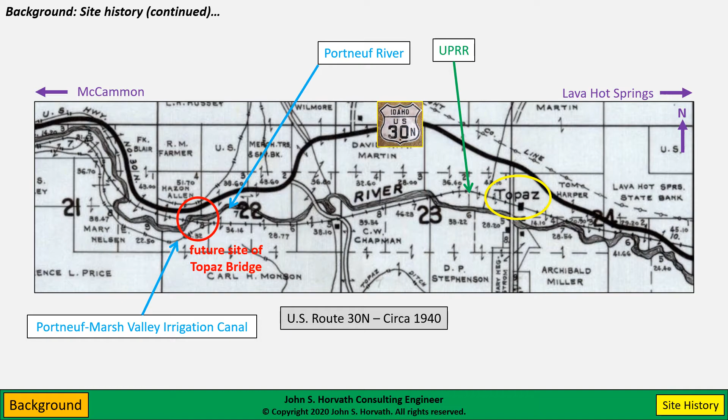Here are some historical photographs through the area. We see that the Portneuf River Valley is, for the most part, a fairly wide, flat valley, very classic meandering river type valley. There are mountains both to the south and the north, and you could see that the circa 1940 US Highway 30N was fairly typical of that area, certainly what was called an improved road in that it had a pavement wearing course.

In the late 1940s, right after the end of World War II, there was a decision to relocate a section of US Highway 30N, beginning on the west at this red asterisk and continuing to the right beyond the limits of this particular map. The site of the future Topaz Bridge was just to the east of the beginning of this relocation. This late 1940s relocation essentially moved the highway from the north edge of the valley to the south edge. So the original US Route 30N traversed the northern edge of the valley, the foothills of the mountains to the north, and the relocated US Highway 30 traversed the southern edge of this valley along the mountains to the south.

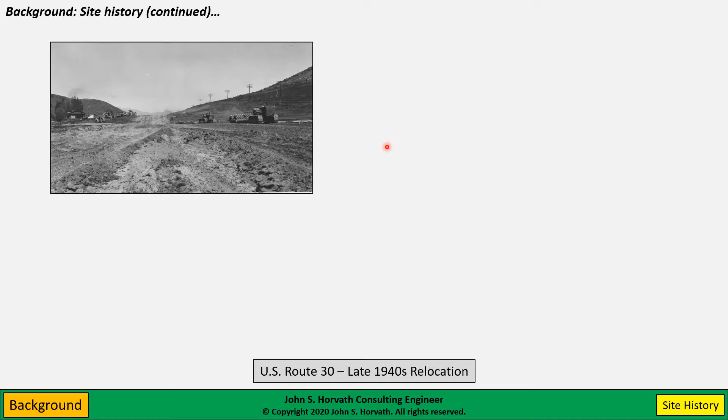These are some historic photos during the relocation effort. The embankments for the relocated road were constructed using native soils, which are predominantly fine grained in nature. So you see the use of a sheep's foot roller, which is then and now not uncommon when you have fine grained soils.

Because the relocated road would have to cross the Portneuf River, the decision was made to channelize the river through corrugated metal culverts. Keep in mind, by the time the highway was relocated in the 1940s, the Portneuf Marsh Valley Irrigation Canal already existed. So this just shows the installation of corrugated metal culverts with poured in place Portland cement concrete head walls to allow the embankment for the relocated highway to cross the Portneuf River Channel.

A significant feature of the relocation was the so-called Topaz Bridge. The Topaz Bridge was a 5-span structure. The center span was a truss bridge, quite typical of the era, and that spanned over what was then the double-track main line of the Union Pacific Railroad.

I like to call the original Topaz Bridge a bridge over a bridge, because at the exact same location that the relocated U.S. Highway 30 crossed the railroad, the railroad crossed over the Portneuf Marsh Valley Irrigation Canal. You don't see it very well in this photo, but the railroad here is on a bridge crossing the canal.

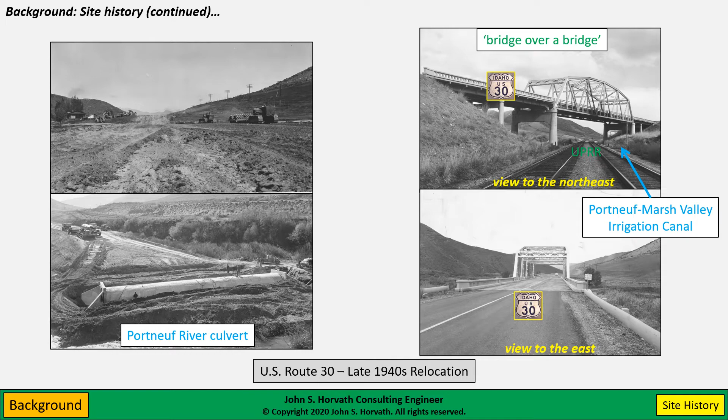Looking at a map of the area, we see that the Portneuf River is a very classical meandering river. We see remnants, oxbow lake remnants of prior channels of the Portneuf River. And we see that the Portneuf Marsh Valley Irrigation Canal begins right up here. These two colored asterisks mark the beginning and the end of the 1940s relocation of U.S. Highway 30N to U.S. Highway 30 through the area.

Again, this relocation is what caused the construction of the original Topaz Bridge. By the way, the original alignment of U.S. Highway 30N still exists. It is now appropriately labeled Old Oregon Trail Road. So the original U.S. Highway 30N still traverses through the area.

This is an aerial photograph from circa 2010, just before the project history, case history I'm going to discuss today. This red asterisk here is the same location as here. We see the Portneuf River. We see the Portneuf Marsh Valley Irrigation Canal. The canal begins right around here.

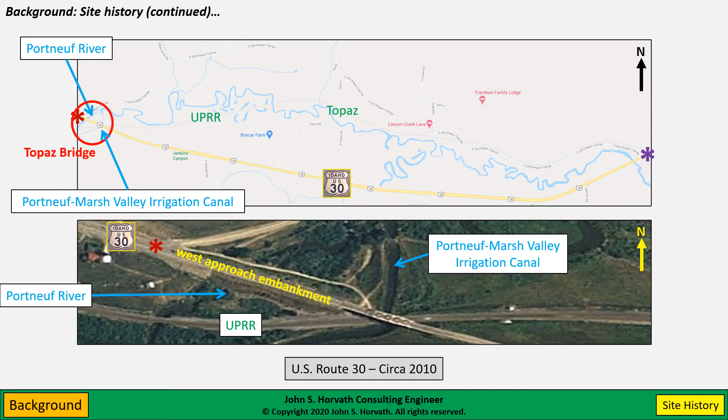These are some additional photographs from around 2010, just before the project I'm going to discuss today. This is a view from the west approach embankment toward the east. Again, we see the railroad here, the Portneuf River, and this is the west approach embankment that features prominently in my presentation today.

Fairly steep sides, about 1.5 horizontal to 1. You can see that the Idaho Transportation Department has had trouble over the years trying to keep the embankment stable against erosion. This area in Idaho does not get a lot of rainfall precipitation. It gets approximately 12 inches, 1 foot of rainfall per year, so about 300 millimeters.

That's about one third the average rainfall in the United States. The area does get a fairly significant amount of snow, approximately 4 feet on average, so somewhat greater than 1 meter of snowfall per year. But all in all, this is a fairly dry area, and most of the farming in this part of Idaho is what they call wet farming, which requires irrigation during the growing season.

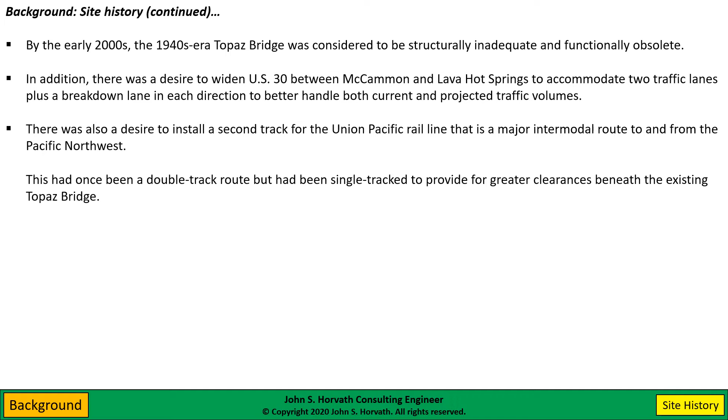Concomitant with that was the desire to reinstall a second track for the Union Pacific Railroad, as this is a major intermodal route to and from the Pacific Northwest. As you saw in an earlier photograph, this had once been a double track route, but the railroad had to single track it to provide for greater clearances beneath the existing Topaz Bridge, both vertical and horizontal, to account for intermodal traffic, what is sometimes called double stack traffic, where they stack one trailer on top of another.

The constraints of the existing Topaz Bridge did not allow the railroad room to add a second track with modern clearances. So the decision was made, for a variety of reasons, to replace the Topaz Bridge and widen the roadway to a total of 4 traffic lanes plus a breakdown lane in each direction. Essentially, a 2-lane road with very narrow shoulders had to be transformed into a 6-lane roadway. This was quite a significant reconstruction, not a simple rebuilding to the same parameters that existed—a very substantial increase in the number of lanes.

In this next segment, I'm going to go through an overview of the design issues that drove the design of this project, to form a background for why the project was designed the way it was. The proposed Topaz Bridge replacement and widening had quite a few significant technical issues as well as logistical constraints, so it wasn't just a simple improvement project of rebuilding in kind.

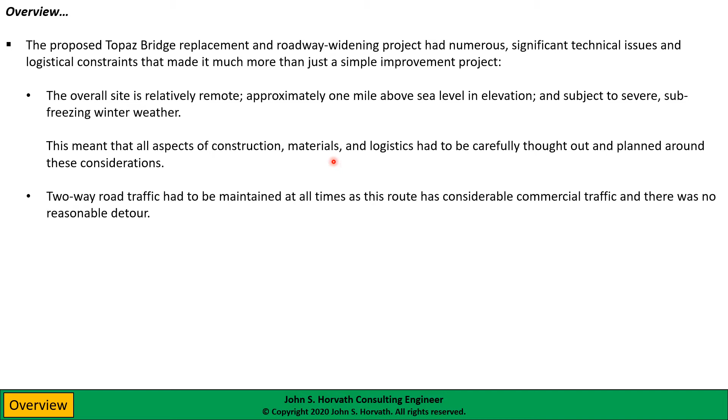Another significant requirement is that 2-way road traffic had to be maintained at all times. This route has considerable commercial traffic, and given the remoteness of the area, there was no reasonable detour. It was certainly not feasible to send traffic through the original US Route 30N—this road simply could not accommodate that type of detour.

Among other things, this meant that the replacement bridge wasn't just a single bridge—it had to be built as 2 separate parallel bridges, later connected to function as a single 6-lane right-of-way. In addition, rail traffic had to be maintained more or less at all times. This was a very significant main line of the Union Pacific Railroad, and although the railroad could accommodate some short closure windows, a shutdown was certainly not feasible.

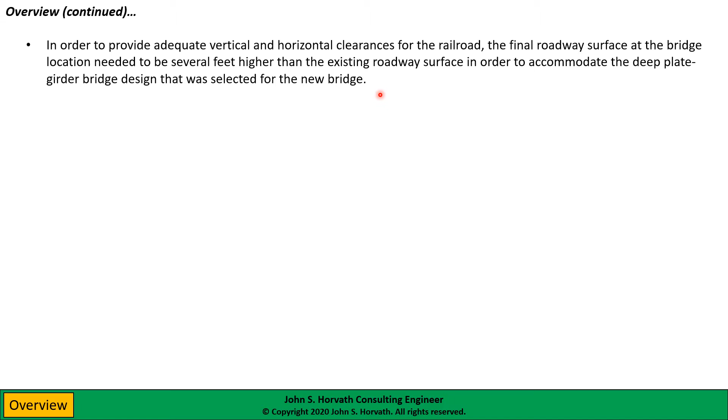In order to provide more clearances for the railroad, both vertical and horizontal, the final roadway surface at the bridge location had to be higher by several feet, a couple of meters, compared to the existing roadway surface. This was especially true because the design alternative for the replacement bridge was not a truss, but a deep plate girder—they did not replace the bridge with the same type. They went with a deep plate girder bridge, so they had to provide additional clearance on the underside, meaning the new roadway surface was quite a bit higher than the original.

They also needed more horizontal clearance of the rail right-of-way. Another significant consideration is an extreme skew angle, a very acute angle between the roadway and the railroad. This meant the clear span of the new replacement bridge was much, much longer than if you just had a simple orthogonal crossing. As we know in structural engineering, bending moments as a first-order approximation vary as span length squared, so this meant a very substantial deep plate girder was needed to carry the design loads, which we'll see in subsequent photographs.

This shows the pre-construction aerial view circa 2010. Again, you see between the railroad and US Route 30 a very, very acute angle of this crossing. This meant the clear span over the railroad required a much, much longer clear span than if the highway and the railroad simply crossed at 90-degree angles or something closer to 90 degrees.

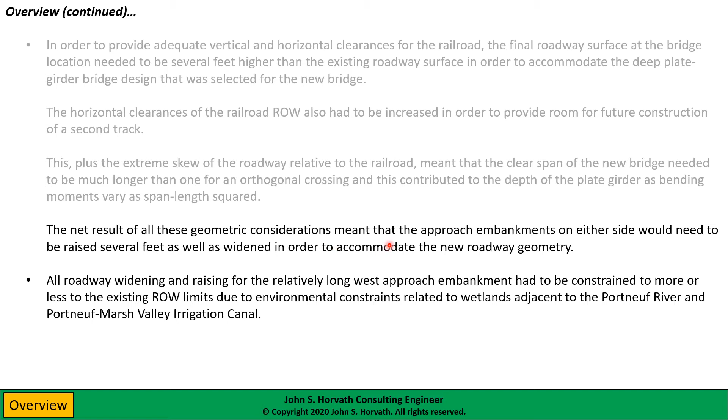The bottom line is that the approach embankments on either side needed to be raised several feet, a couple of meters, as well as widened to accommodate the new roadway geometry. So it wasn't just the bridge that was a challenge—there were also challenges with the approach embankments. The west approach embankment is quite long, and all this widening and raising had to be constrained to more or less the existing right-of-way limits. In simple terms, they had to stay within the existing toe slope of the existing highway due to environmental constraints, because you had wetlands adjacent to the Portneuf River and the Portneuf Marsh Valley Irrigation Canal.

Here's the original Topaz bridge that had to be replaced, and here is the west approach embankment, quite long. We could see that there are wetlands on either side, so there was quite a bit of constraint in terms of what could be done horizontally to both raise and widen this west approach embankment.

As we'll see, the east approach embankment was trivial. There really were no significant issues there. Putting all these design considerations together, it meant the new west approach embankment had to have vertical faces along both the north and south sides. We could not have sloped sides as with the existing embankment.

The reason the west approach embankment really drove this project from a geotechnical perspective is that it crossed a deceptively wide meander valley of the Portneuf River. The Portneuf River Valley was quite narrow at the actual bridge location, and over the millennia, the wandering Portneuf River had eroded a relatively deep, steep-walled depression within the underlying basalt bedrock. This meander valley had been filled over the millennia with fine-grained soils that were quite compressible and relatively weak.

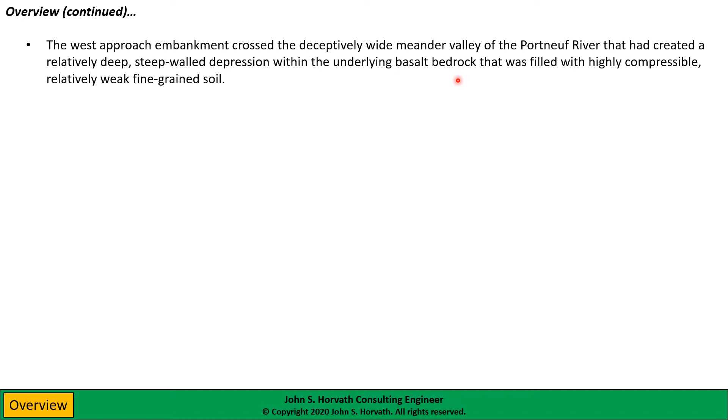On the other hand, the basalt bedrock at the actual bridge location was relatively shallow, and certainly shallow beneath the relatively short east approach embankment as well. So all of the geotechnical issues really involved the west approach embankment. Not to trivialize the bridge foundations or the east approach embankment, but these did not present any inordinate unusual challenges.

I'll show you a couple maps that show you in more detail what I'm talking about. Here we see the US Route 30 alignment. The contours on this map are in meters, so 1,500 meters - we see this is a mile or so above sea level.

We see relatively steep mountains to the north and south of the Portneuf River Valley. Through much of this area, the Portneuf River Valley is relatively wide, but as we get to the Topaz Bridge site, the valley narrows rather significantly - there's not too much horizontal distance between these two mountains. So while throughout much of the valley the Portneuf River has meandered over the millennia, as you can see from the oxbow lakes, it's been constrained quite a bit at this location, so it eroded a relatively deep valley.

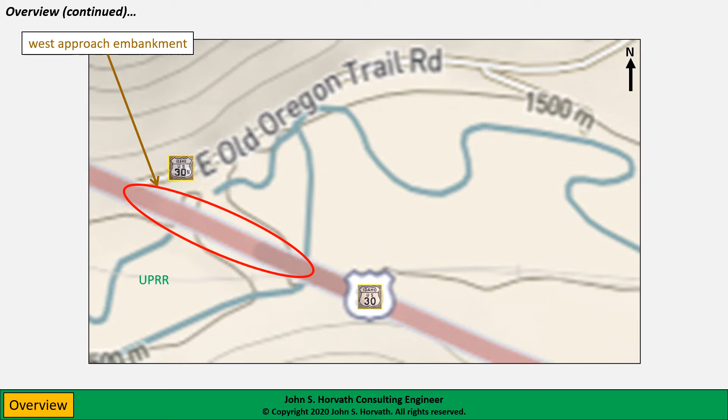The point I'm making here is that for the west approach embankment, settlement - both total and differential - as well as shear strength, both as a function of time as a result of any new fill placement, were concerns. And because the embankment on the west side had to have a vertical face, that would have required some type of earth retaining structure to retain the new fill. These were all major design and construction issues, and also long-term operation and maintenance issues.

This final operation and maintenance aspect was certainly supported by observing the existing west approach embankment, which had been in service for roughly 40 years and exhibited multiple areas where the roadway surface had differential settlements and very noticeable cracks in the pavements. Again, in the slides I showed you previously, this is the west approach embankment, going from shallow bedrock to deep bedrock.

The transition from shallow to deep and back to shallow bedrock, as seen in the borings drilled for this project, showed almost vertical cliffs below ground - almost vertical faces in this valley. So there were very abrupt transitions from shallow rock, to deep rock, and back to shallow rock as you traversed along the alignment of this road. At the bridge itself, the rock was shallow, and certainly the east approach embankment on the other side had shallow rock too. But along this side, the rock was surprisingly deep.

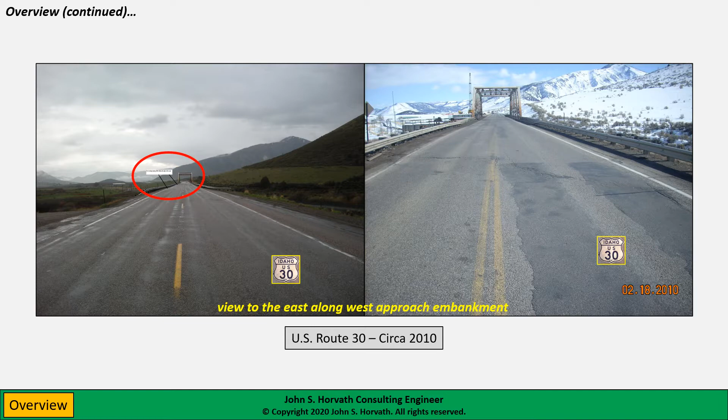So again, as I pointed out earlier, this existing roadway that had been in service for about 40 years was basically telling the design engineers, hey, look, there are geotechnical problems in this area.

Well, just to add to things, to make life interesting, the site has a very significant seismic potential. That meant all the project components, the bridge as well as the approach embankments, had to be designed for seismic loading.

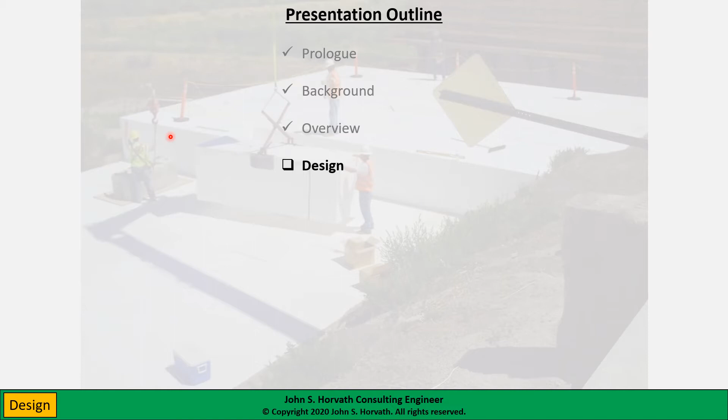Having discussed the overview of the technical and logistical issues that really drove this project, I now want to talk about the specific design choices that were made with respect to the West Approach Embankment. I've divided this segment up into several topics to present the material in a logical fashion, as well as to facilitate your viewing.

An overview of the design concept: the overall project called for the existing two-lane roadway alignment to essentially become the new eastbound travel and breakdown lanes. That meant all the roadway widening for the new westbound travel and breakdown lanes would occur to the north of the existing roadway and existing West Approach Embankment, in the direction towards a wetland area between the Portneuf River and Portneuf Marsh Valley Irrigation Canal.

To look at this on the map again, this was in 2010, just prior to the beginning of the project I'm talking about. The original 1940s Topaz Bridge, the West Approach Embankment, and here we see the Portneuf River and Portneuf Marsh Valley Irrigation Canal. So all the expansion would occur in this direction to the north, widening from essentially 2 lanes to effectively 6 lanes, with the northward expansion.

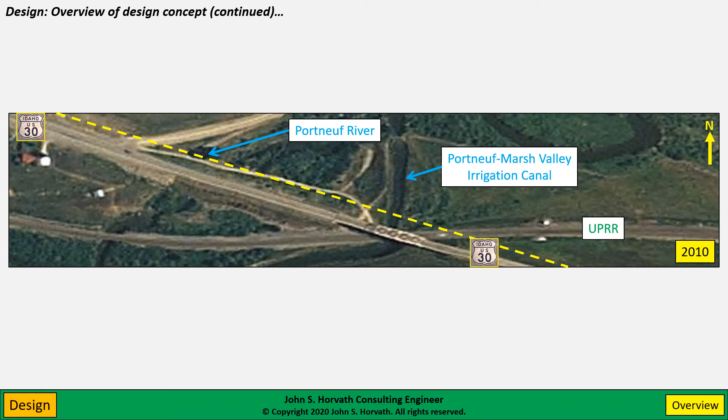And again, this had to be constrained within the existing toe slope of the West Approach Embankment. So the final earthwork had to have a vertical exposed face on both the north and south sides, to stay within the existing right-of-way limits to the greatest extent practicable.

So here we're looking from the West Approach Embankment, and this is the wetlands area that had to be kept as much as possible. That meant all the raising and widening had to occur within pretty much this existing toe slope. Quite a challenge - you're trying to turn 2 lanes into what amounts to 6 lanes and yet stay within the existing right-of-way limits, while making the embankment higher at the same time.

Because of the fine-grained, weak compressible nature of the soils beneath the west approach embankment, there was a desire to reduce the vertical stress increase to as close to zero as practical. This is what we refer to, when using EPS-Block Geofoam, as a net zero design, meaning that after all is said and done, the vertical effective stresses on the existing subgrade are essentially no greater than that which existed prior to construction. An extraordinary challenge, to say the least, but one that has been met and satisfied many times now in recent decades. So certainly was not impossible.

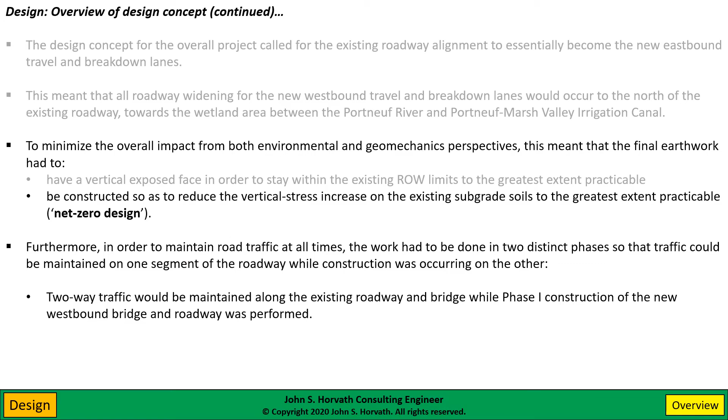Once this was done, phase 2, the 2-way traffic would be diverted to the new road and bridge that had just been constructed, while the existing bridge was removed, replaced, and the approach embankment raised for that bridge. So really an intricate choreography going on.

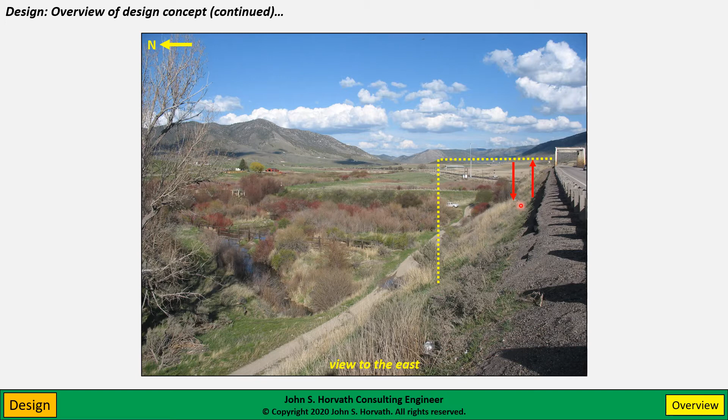So after phase 1 was constructed, the new bridge would be built here, the new embankment widened and raised, the 2-way traffic moved over here. Then the existing bridge would be removed, a new plate girder bridge constructed identical to the first one, and the roadway embankment raised.

As I said, a very intricate choreography that had to be done in an area that was very remote, subject to harsh weather and shutdowns during the winter season.

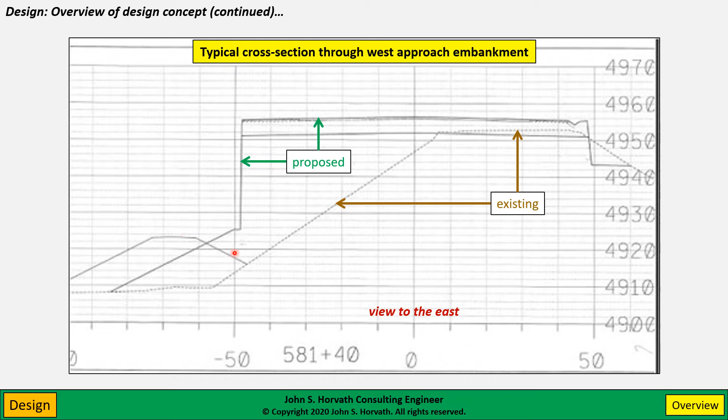I now want to talk about the EPS-Block Geofoam that was used for the west approach embankment. The project design team, after considering all the design challenges with the soil conditions, seismic design, etc., and with concurrence of the owner, the Idaho Transportation Department, ITD, decided to use EPS-Block Geofoam as the primary earthwork material for enlarging the west approach embankment.

Now, simply using EPS-Block Geofoam was in and of itself a historical first for the ITD. The ITD had never used or permitted the use of EPS-Block Geofoam for any of its roadways.

And by the way, you should know this from having hopefully viewed my primer presentation on EPS geofoam, but we never ever should use the word geofoam by itself. Contrary to popular belief, geofoam is not one material. It's not one product made from that material. There are many types of geofoams. They could be polymeric or plastic. They could be glass. They could be cementitious. So it's very important to specify specifically what type of geofoam is being used.

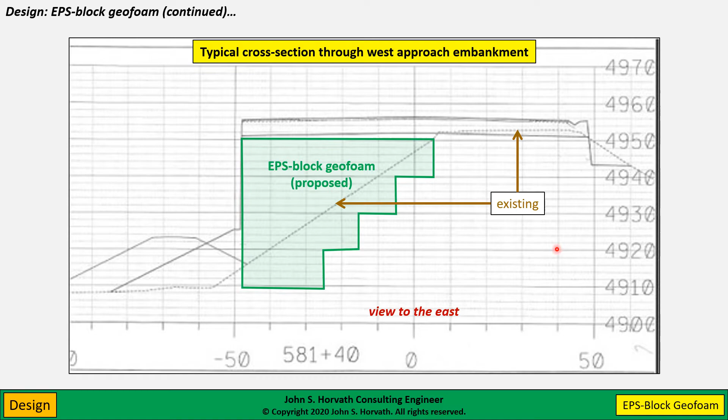EPS blocks placed in an appropriate way, meaning you stagger the joints and place them in alternate directions and alternating layers, as well as use appropriate connector plates, have proven acceptable even in relatively significant seismic conditions. I'm going to show you a brief video that, to me, is proof positive of this.

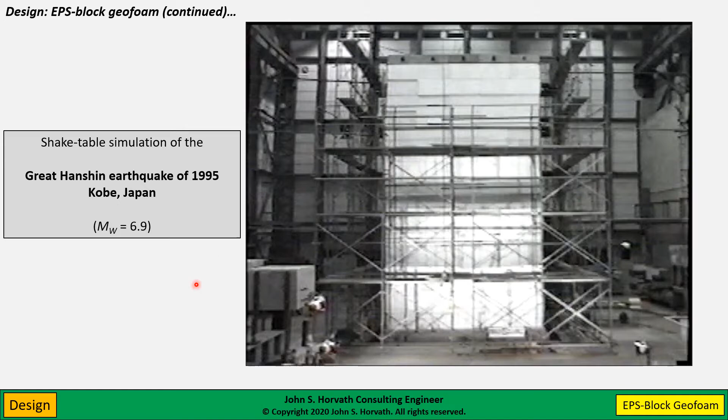Well, we now know better, of course, thanks to the shake table tests. There's a couple of documents you can access on my ResearchGate webpage that talk about seismic designs of EPS-Block Geofoam embankments, discussing this complex, combined flexible and rigid behavior.

These seismic design issues are also incorporated into a large multi-year National Cooperative Highway Research Program study for which I was honored to be a co-principal investigator. This work was done on the cusp of the 21st century, and fortunately we began this work just after the Japanese shake table tests had become available to me. I was very fortunate that the Japanese shared this information with me, as well as English language translations of their published work.

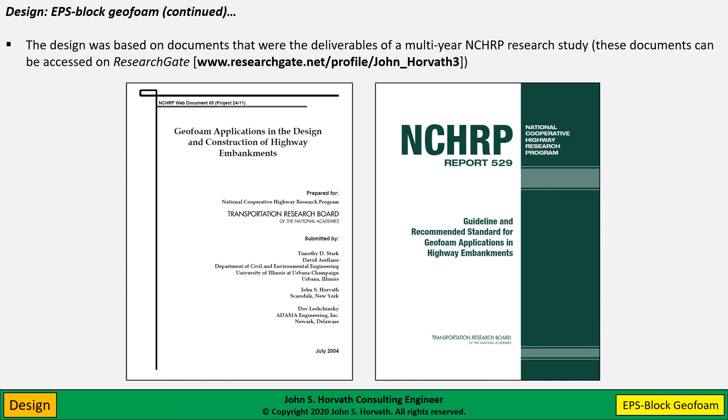Also, I was very fortunate that around the time the Topaz Bridge project was being designed, 2008, 2009, the famous Big Dig Interstate Highway project in Boston was wrapping up. I was very fortunate to be involved as a consultant on the Big Dig project. The Big Dig in Boston involved about a dozen EPS-Block Geofoam fills that were very broadly similar to what was being proposed for the Topaz Bridge project.

All of the lessons learned were incorporated into the Topaz Bridge project. I should point out that all of these EPS-Block Geofoam fills on the Big Dig were net zero stress designs.

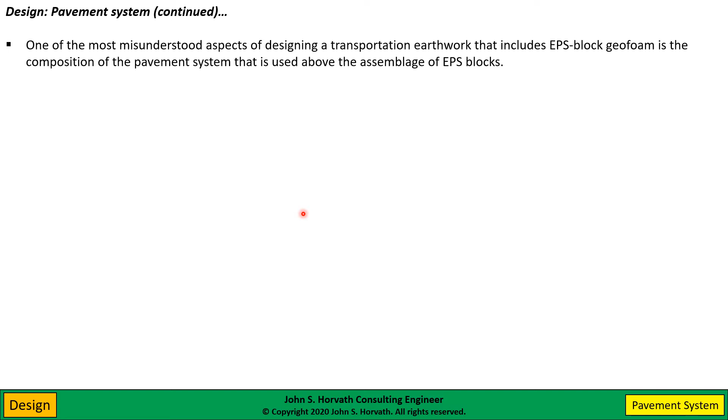There are several, I think, very significant misunderstood aspects of designing earthworks with EPS-Block Geofoam. The first one I want to address involves the pavement system, that is, what goes into the pavement system that is used above an assemblage of EPS blocks.

There is a persistent urban myth, and it really is an urban myth—I can't be kind about this—that seems to be very strong in the United States. In Western Europe, they got beyond this myth decades ago, but here in the United States there's this persistent myth that you need a reinforced Portland cement concrete slab, usually referred to as a load distribution slab, or LDS, that's always required if you have a road, railroad, airport runway or taxiway over EPS-Block Geofoam. There's this myth that you need a concrete slab between the pavement system, or as part of the pavement system, on top of the EPS blocks.

I don't know how to emphasize it too strongly: this is simply incorrect, you do not need a slab. And that's not just me talking, my opinion, or feeling. There are decades, literally decades, of global research going back to the 1970s, 80s, and 90s around the world, in Japan as well as in Western Europe. There's global research as well as many case histories that support the non-use of these load distribution slabs. This work has been published in the English language many, many times since the mid-1990s.

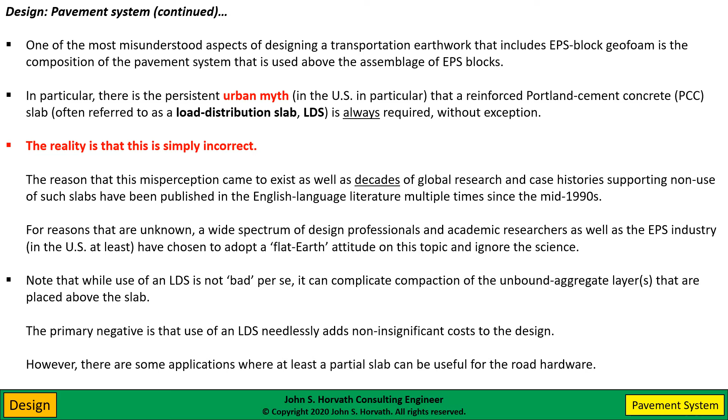Another one of these myths is what I call the leaking fuel scenario. This is another thing that people like to pontificate about. The scenario usually put forth is that you have some vehicle accident involving a fully loaded tank truck, usually a semi-tractor trailer—an articulated lorry—carrying gasoline or some other petroleum liquid.

This truck overturns, all the contents leak out onto the roadway surface, and then all of the liquid magically somehow penetrates through the impervious wearing course—either asphalt or Portland cement concrete—on the surface, and percolates through all the pavement layers. Keep in mind that a typical pavement system on top of EPS blocks is about 1 meter, or 3+ feet, thick. So the assumption here is it's going to penetrate through all this material and then dissolve the underlying EPS.

EPS, as with many synthetic materials, has pluses and minuses. And the interesting thing with EPS is you could put it in acids—sulfuric, hydrochloric acid—and it's not going to dissolve. But you put petroleum on it, and it's going to dissolve instantly. So that's the concern here.

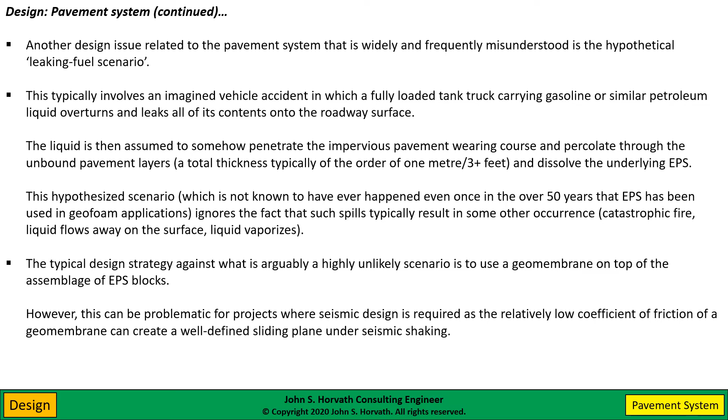The correct way to design a pavement system of an assemblage of EPS blocks, any type of pavement for road, airfield, or railway track system, is no different than any other pavement or railway track design. But for pavements, the important caveat is that you need sufficient total thickness of material to prevent what we call differential icing in climates where this is a physical possibility.

Differential icing is really the result of hoarfrost development. And it's important to understand the air temperatures do not have to be below freezing in order for hoarfrost to develop on a pavement. Let me explain why and how.

As we know, the interaction between the Earth's atmosphere and the surface of the Earth is very complex. You have inputs in various ways - first of all, heat can flow in three different ways: convection, conduction, radiation. You can also have heat transfer due to phase change of liquid water.

So there's heat flowing in and out of the Earth's surface from the atmosphere depending on the time of day - is it sunny out, is it dark out at night - depending on the season of the year and areas that have seasonal temperature variation. All of this net in and out flow results in some net heat flux into the ground. This is balanced by the geothermal heat flux, which is just the heat naturally coming from the center of the Earth. So there's a very complex interaction here.

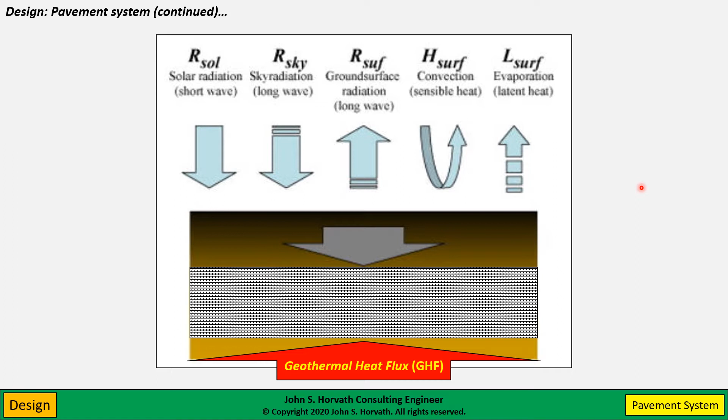The point is when we come along and place EPS blocks in the ground, we're going to severely and significantly interrupt this give and take in nature between the atmosphere and the Earth's interior. That's because EPS has a thermal resistivity that's typically about 30 times that of soil. What I mean here is that a unit thickness of EPS has the same thermal resistivity as about 30 times that thickness of soil.

You want to put it into some hard numbers. If I had roughly 30 feet, 10 meters of EPS - which would not be unusual for a road embankment such as the Topaz Bridge project - that 30 feet, 10 meters of EPS has the same thermal resistivity as about 900 feet, 300 meters of soil. So I think you could see that there's really going to be quite a disruption here.

Where the disruption is particularly problematic is at night, because at night there tends to be a net heat flux from the ground surface to the atmosphere due to long wave radiation. This is particularly significant on clear nights where we don't have clouds in the sky - clouds tend to reflect that radiation back. So you have a clear night and you don't have much wind. If you don't have much wind, you'll get more radiation as well.

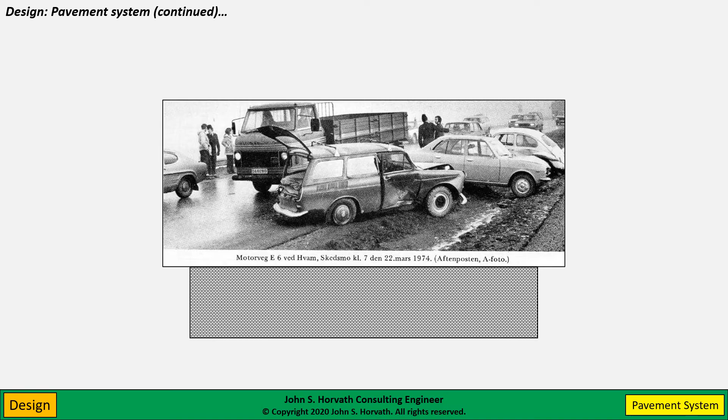If you want to read more about this whole issue of heat transfer - and by the way, this applies to non-earth subgrade materials in general. We're talking here about EPS-Block Geofoam, but you can use things like tire shreds or other non-earth materials as an alternative to soil in an earthwork, and run into these same problems that you need to account for. I did some research on this about 20 years ago, and you can find a little research report I wrote on my ResearchGate website.

Now, the majority of pavement systems used above EPS-Block Geofoam earthworks use asphalt concrete as the wearing course, although sometimes Portland cement concrete is used. For example, on the Big Dig, this was done only for aesthetics because they had elevated structures with EPS fills, and they didn't want to see what they called a checkerboard effect - a light colored pavement, dark colored pavement, back to light colored. So they made a design decision to use concrete pavements throughout.

But it is most common to use asphalt pavements with EPS earthworks. And as we know, pavement systems that use asphalt concrete as the wearing course are much more dependent on the underlying unbound aggregate course or courses for structural performance. You have to design this layer cake of a wearing course, one or more layers of aggregate. Pavement research in general over the years has shown that some type of confinement or stiffening of the unbound aggregate layers, whether the underlying subgrade is soil, EPS, or something else, is often beneficial.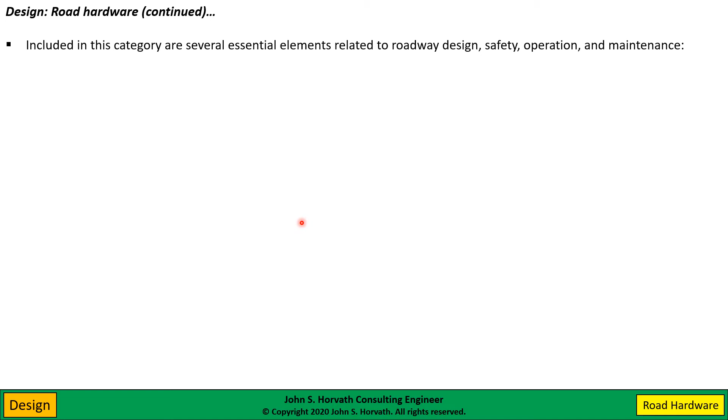So essentially, this is actually a very clever design. They were able to use the wire mesh reinforcement not only for these gabions as a mechanically stabilized earth wall, but also to provide reinforcement of the pavement system. So it was a very efficient, clever design in this case.

For the safety barriers, they used jersey barriers, and in some places these are called K-rails. They used precast concrete jersey barriers only along the edges. They did not use them along the center median in this case. And these were secured into the gabions, with foundations that were embedded into the gabions. In this case, the jersey barriers had cutouts at the bottom, and we'll see in a second, this was actually part of the drainage system.

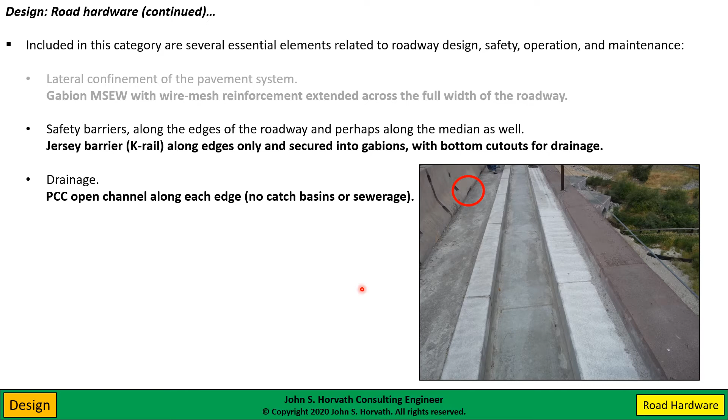No signage in this case, no roadway lighting.

I next want to talk about the facing system. Certainly when you have a vertical sided EPS-Block Geofoam fill, you need to pay attention to the facing. Facing was needed on this side for the gabions and the earthwork, the existing earthwork.

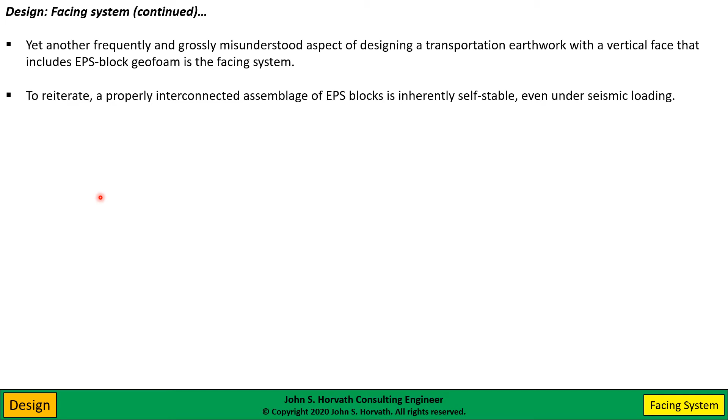This is yet another urban myth or misunderstanding with transportation earthworks with a vertical face that includes EPS-Block Geofoam. Again, I reiterate that a properly placed EPS block with connector plates or connecting devices is inherently self-stable, even under seismic loading. It's worth watching that Japanese shake table test yet again.

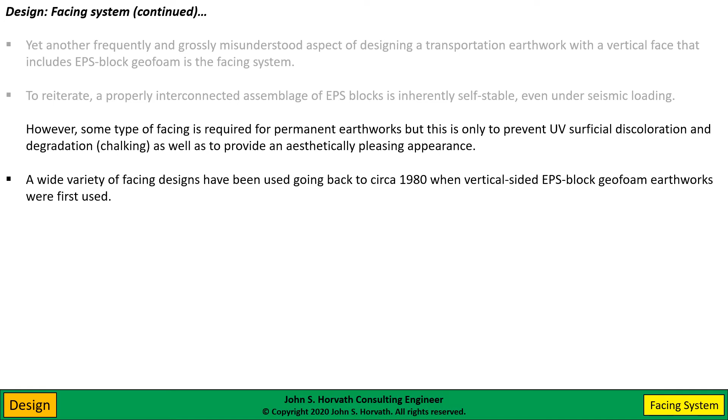But as I said previously, on a permanent earthwork, you do want to have some type of facing to prevent surface discoloration and chalking, as well as for an aesthetic appearance. Quite a variety of facing designs have been used going back around 40 or so years when vertical-sided EPS fills first were used. Let's look very quickly at different ones that I've seen used.

Cast-in-place Portland cement concrete, a very big favorite - this happened to be a project in Chicago. Precast concrete panels, another very big favorite in the United States. Precast concrete lagging with galvanized steel H-piles - they've used this in Japan several times in mountainous areas. These H-piles are drilled into the underlying bedrock.

Some type of precast block facing - in this case, this was an early project in the United States. In the western United States, they used segmental retaining wall blocks, just off-the-shelf segmental retaining wall blocks. The blocks are doing nothing here but holding themselves up. This provides a face that is nominally vertical. As we know, the way these blocks connect, they have a slight backward batter to the face when finished.

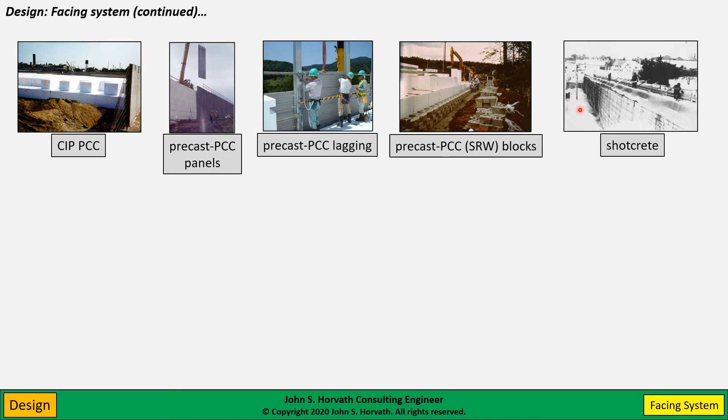For whatever reason, either precast or cast-in-place Portland cement concrete panels have long been the norm in the U.S. Again, I don't have anything against them - it's just they come at great expense.

As part of doing the NCHRP research about 20 years ago, we got actual project bid costs on several projects in the United States, including some very high-profile interstate projects that I won't mention. So using actual bid numbers from actual projects, on more than one occasion, I've seen where the cost of the facing system is the same as the cost of 4 or 6 lanes of EPS blocks between the facing, which to me is, I don't know, ridiculous.

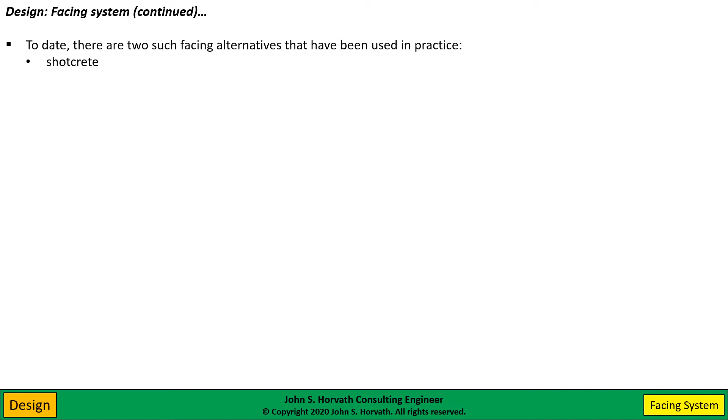There's really 2 alternatives that have been successfully used in practice. One is shotcrete, and this dates back to the late 1970s, circa 1980. And the aforementioned exterior insulation and finish system, EIFS, or sometimes called synthetic stucco. Now, there's considerable design variability with both, especially with the EIFS, in terms of the appearance and color of the final product.

With EIFS, you can make it look like anything you want. You can make it look like cut stone, you can make it look like wood. You go to amusement parks like Disney World, and you look at Cinderella's castle and think it's made out of rock. It's not—it's got EIFS as the facing system made to look like rock. So you can make it look like a lot of things.

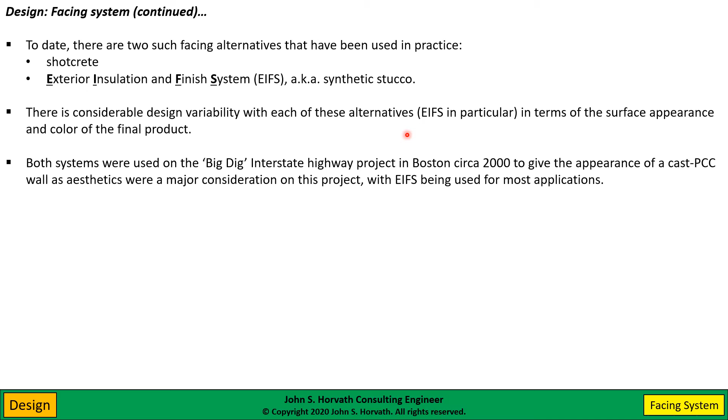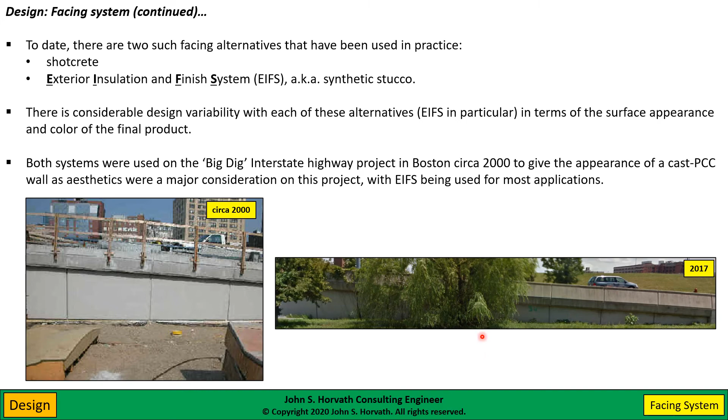There was a nice magazine article written almost 20 years ago that shows how, with a two-layer application system, they were able to get shotcrete to have a final look like cast-in-place concrete. So my point is that if you have a high-profile project where aesthetics are a priority and somebody wants the look of cast-in-place concrete, you can achieve this without cast-in-place concrete. You can either use the EIFS system or you could use shotcrete.

Both of these are fairly thin layers. You can see here, they're supported directly on the EPS blocks. You don't need a fancy, expensive, deep foundation system to hold it up. The assemblage of EPS blocks is holding up its own facing.

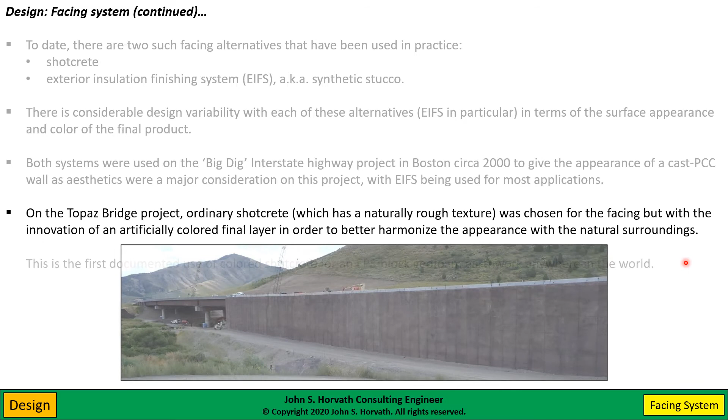So the designers here, even though this was a rural area, were not ignorant to visual aesthetics. They were willing to live with the rough shape of the shotcrete, but colorized it to harmonize with the natural surroundings. This was the first documented use of colored shotcrete on a geofoam project anywhere in the world. I'll show you a photo a little bit later where you can see the contrast between the colorization and normal concrete color.

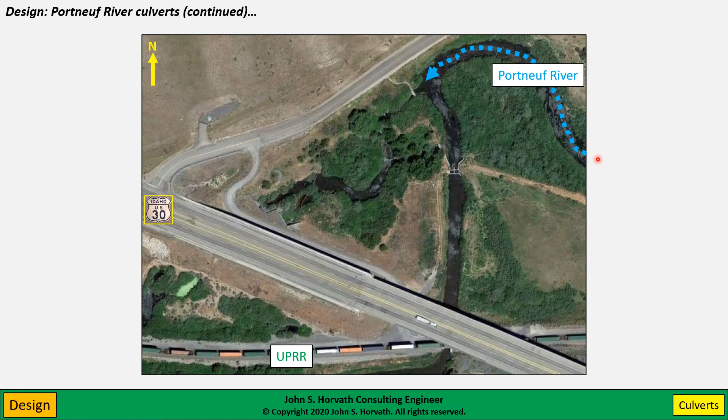Well, the final design issue to talk about is extension of the Portneuf River culverts. The beginning of the Portneuf Marsh Valley Irrigation Canal is just north of the project site, so it diverts most of the flow of the Portneuf River. But there still is some residual flow of the river that goes underneath US Route 30 right-of-way through culverts. Here's an aerial photo—this is actually at the present, but it works for our purposes. Portneuf River again flowing from east to west, and here's US Route 30.

Just north of the project site, you have a series of flow control structures—you can see them, 1, 2, 3, 4. This is the major one, the beginning of the Portneuf Marsh Valley Irrigation Canal. You can see here's the width of the river, and here's the width of the canal. Most of that flow from the river is diverted into the irrigation canal, and what is left in the river is much more modest.

So here's the remnant of the Portneuf River. In the original 1940s relocation, this was accommodated by corrugated metal culverts, as I showed you previously. I showed you this photo previously, where you have culverts under the existing embankment.

So the widening required extension of these culverts and the creation of new head walls on the north side using shotcrete. The culverts had to be extended to the north again, because all the widening occurred to the north, upward in this photo. The culverts had to be extended and required new head walls.

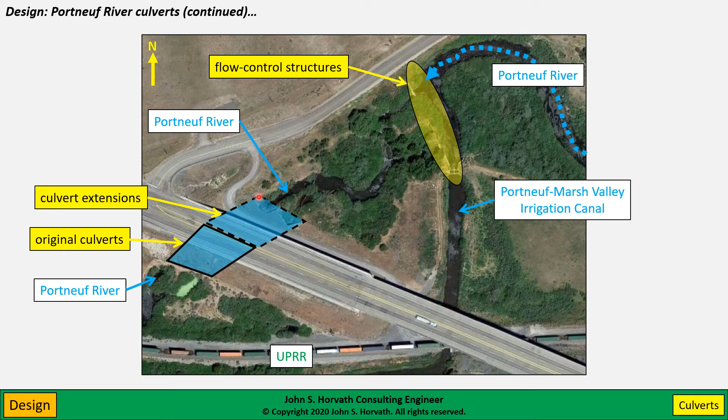Well, I now want to talk about the actual construction. Here I've divided the topics not by technical subject, but really more by time, and the different phases of construction. I also have a discussion of quality assurance, which is always very important.

And the 2009 construction season included installation of drilled shaft foundations and support elements, piers, abutments, things like that for the new westbound bridge in this area. Also extension of the Portneuf River culverts over here.

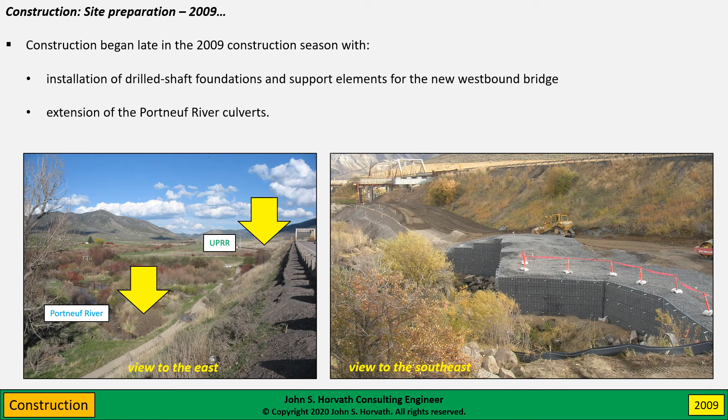For our purposes, really, the Phase 1 construction, 2010 construction season, was the most significant. What the Phase 1 construction involved was the completion of the new westbound bridge here and the raising and widening of the embankment. Again, the goal was to essentially keep the embankment within the toe of the original embankment while allowing for a relocated access road down here.

Most of the EPS block placement was performed during the latter part of the 2010 construction season. And rather remarkably, the EPS block molder that supplied the project was located 1,200 kilometers, 750 miles from the project site. This is not a typo. Yes, there was a closer EPS block molder, but this was the block molder selected by the contractor.

I'm not sure if people keep track of these things, but in my mind at least, this has to be a record for the distance between an EPS block geofoam project and an EPS block molder, at least in the United States. This is really a rather extraordinary distance, for reasons I will get to in a second.

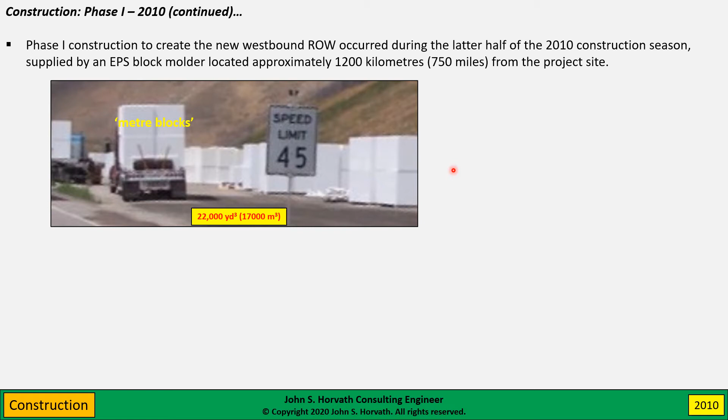I cannot emphasize strongly enough, and I will do it several more times before this presentation is over, that you don't want to crush or break away or poke holes into EPS blocks.

For the simple reason, you're taking away from its strength. It's important to remember that.

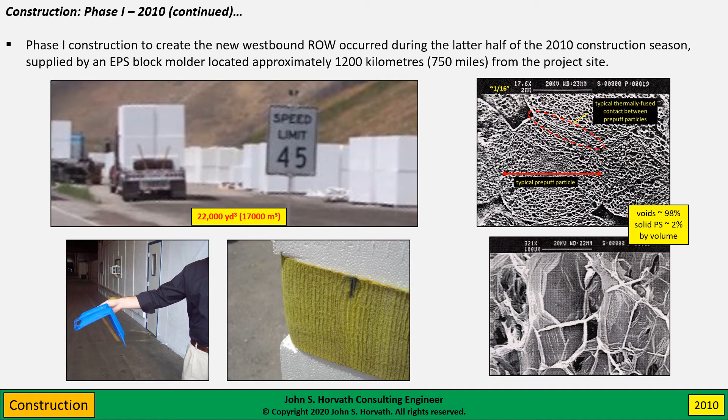Here we see an early stage of construction. The contractor on this project really did, I think, overall a very, very nice job. A lot of good practices to be learned here. So here's the existing west approach abutment.

Again, there's still two-way traffic up here, but you see that this is protecting, well, the vegetation's been stripped away. And as we'll see, there are stair steps cut into this slope.

Here we see the new westbound bridge nearing completion here in the background. Here's the bridge support elements. Here's the plate girder deck up here. Here's the railroad back here. And the canal, the Marsh Valley, Portneuf Marsh Valley Canal is down here.

First of all, when you start an EPS-Block Geofoam fill, you want to have a nice, smooth, clean, dry surface. Here you see some modest over excavation. This is part of the net zero design.

The contractor used generally a sand-sized material here. I believe this was a crushed basalt, hence the dark color. But smooth, level, nice, clean, dry surface.

Very, very careful block placement. If you don't get started right with a smooth starting surface and get those first layers in nice and level, you're doomed to failure. There's no way you can easily correct for errors as you come up.

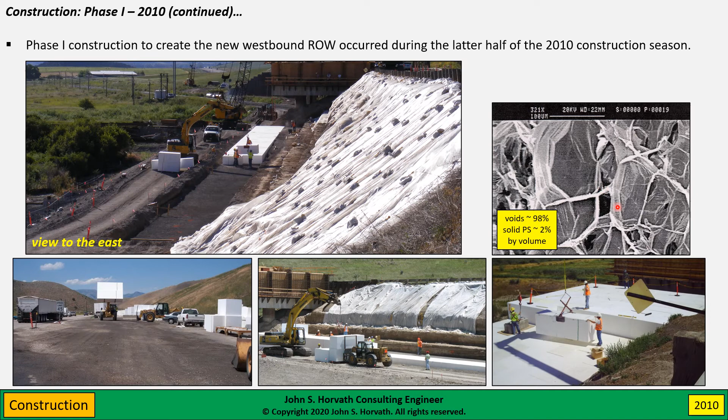Again, all of these efforts are to maintain the integrity of these little cells, these flimsy little polystyrene cells you see here. It's rather remarkable when you think about it - these flimsy thin cells are what's going to hold up interstate type road traffic, trains, and airplanes, but they can only do that if you maintain the integrity of these cells at all times.

Okay, later in the 2010 construction season, you see the embankment starting to come up out of the ground. You see the stair steps that have been excavated into the existing west approach embankment. Very fortunately this was a fine-grained soil, so there were no stand-up issues with the soil, and it's also a fairly dry climate, which certainly helped in this case.

Any gaps between the blocks and the existing stair step are filled with sand. They should not be filled with water bottles, coffee cups, paper wrappers, beer cans, and other debris, as you often see on American construction sites.

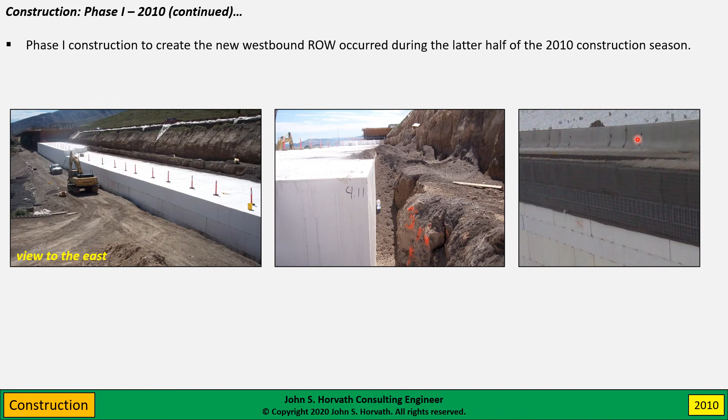Again, you see the new westbound bridge here in the background, a little bit of the existing truss bridge over here, and the new westbound plate girder bridge. You also see that bridge over here. And again here, you see the EPS blocks with the gabions and the rails in place by the end of the 2010 construction season.

Just to look at other aspects of the project, if we take a drive across the existing roadway in the 2010 construction season, here you see them maintaining traffic - they had some temporary single lane traffic going on just over the bridge itself. Here we're driving through the existing truss bridge, and you really see the new roadway surface is going to be up here, at least 6-7 feet, a couple meters higher than the existing roadway.

So here's the new roadway surface up here - you see why the embankments have to be raised. You see the depth of the plate girder - I forget the exact depth, but I think it's probably about the better part of 10 feet, 3 meters, my recollection. Again, progressing across the bridge, you see how much higher the new embankment is compared to the existing roadway surface.

And this is looking back toward the west. This is the existing bridge here. Here we see the new east approach embankment.

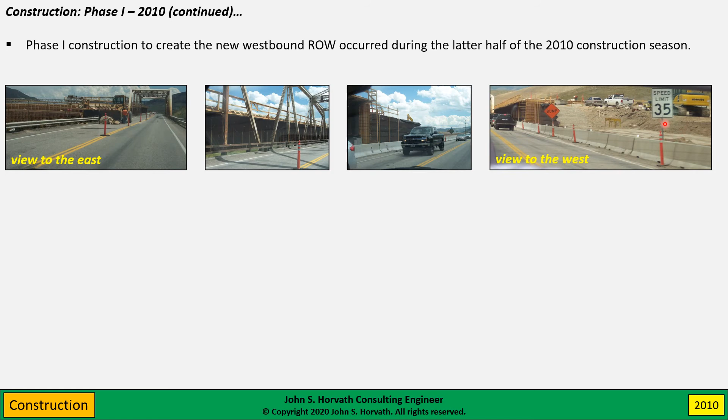And again, they were able to raise this using soil because there's no soft ground under here. The basalt bedrock is fairly shallow, so this was all just soil construction. This is the new, very short, elevated east approach embankment, with the new westbound roadway up here.

Another view here, we see the new westbound plate girder bridge. Again, my recollection is this is about 10 feet, 3 meters deep, I think.

The new widened and raised eastbound approach embankment - you see they did use some gravel-filled gabion walls here because you have the railroad right down here. They had to keep the embankment off the railroad property, basically, so the geometry required some new MSEW, mechanically stabilized earth walls here.

But this is all pretty simple construction, again, because there's no soft ground under here. Basalt bedrock is quite shallow, and you do see the mountains rising to the east, so you get a sense of the mountains relative to the Portneuf River Valley that we're in down here.

Here you see the new head walls for the Portneuf River culverts. You see the shotcrete's been placed, and again, the embankment coming along here.

So by the end of the 2010 Phase 1 construction season, the basic new westbound right-of-way was complete. This is the roadway at its final height. Here's the new bridge, and here you see the end of the earthwork.

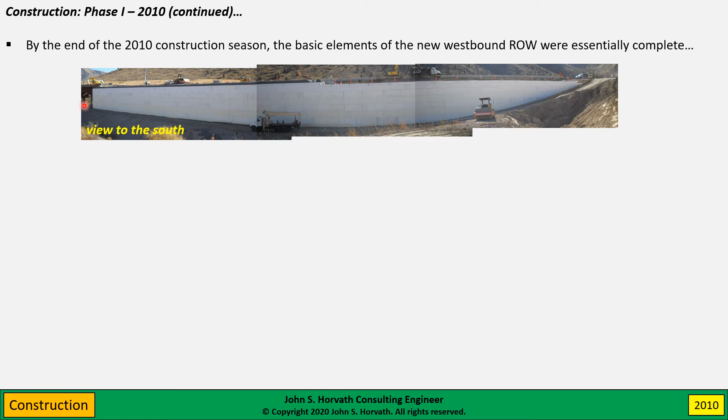So I put together this panoramic of several photos to try to show you the entire west approach embankment towards the end of the 2010 Phase 1 construction season. You see the gabions on top, and the new access road is down here.

Here's another view at the start of winter 2010-2011. You can see the traffic has been diverted from the existing roadway, since just before the cold weather set in, they were able to pave what would be the new westbound roadway. So this roadway is now handling two lanes of traffic, one in each direction, over the new bridge, with the new and improved enlarged west approach embankment. All the traffic's now been diverted as planned. No traffic on the old bridge.

You'll note that through winter 2010-2011 there's no facing placed, and you can actually see in this photo the face of the EPS block starting to yellow and chalk. Keep in mind these lower levels of blocks especially have been placed several months earlier. These photos were taken in, I think, December. It only takes a few months for this to happen, and this is a northern exposure, so it doesn't get a lot of direct sunlight. We're looking at the north face of the embankment, so in the northern hemisphere there's no sun on the north facing anything. But even without a lot of direct sunlight, this chalking develops, as I said, in just a matter of a few months with EPS. But it's really just a superficial degradation. It doesn't burrow into the fill or anything like that.

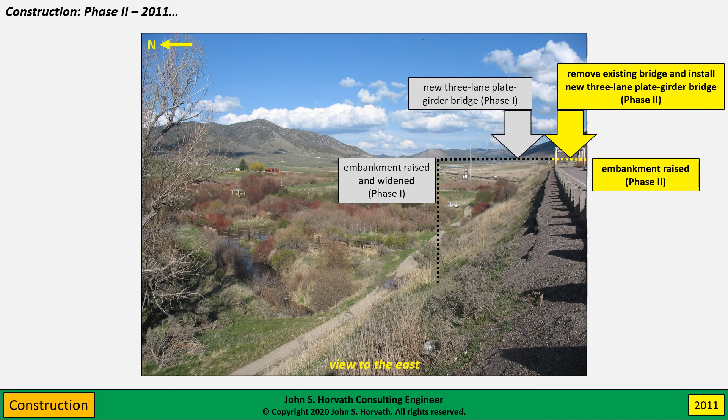For the purposes of this presentation, the primary element of note for Phase 2 was the shotcreting of the faces of the west approach embankment. Really, the foundation for that, no pun intended, was laid the prior year during the EPS block placement. It was a combination of judicious placement of the barb connector plates and a very careful, meticulous placement of the EPS blocks.

Here we see the barb connector plates, fairly standard galvanized steel plates used in the U.S., typically 4 inches square, or about 100 millimeters square. On the exposed face, the contractor left a little lip of the plates hanging out. You see it better in this photo - all of these sticking out here are just the edges of the barb connector plate.

Notice how very carefully these blocks are almost perfectly in alignment - all these faces line up. This is another view looking in the other direction; you see the barb connector plate sticking out a bit. There's real attention to detail when these blocks were placed to keep this face as smooth as possible. I'm emphasizing this because I'll show you a photo later of how not to do things.

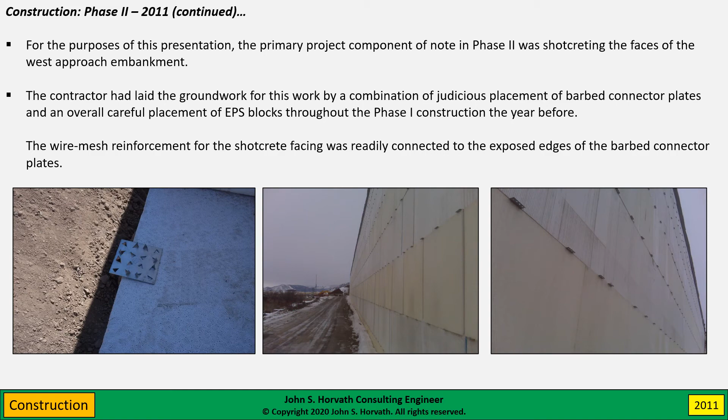So here we see the sequence of shotcreting. This again is a photo from the end of the 2010 construction season, no facing. Here we see facing progressing during 2011, with the wire mesh now attached along this section. In this section, the first layer of shotcrete, just normal colored shotcrete, has been placed, but the second colorized layer has not been placed yet. So we went from this to this to this, and finally by the end of 2011 to this - the final appearance.

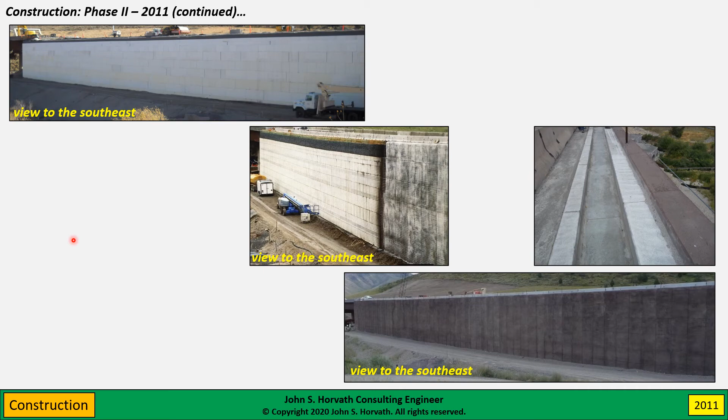Some additional views in 2011 of the finished shotcreted west approach embankment. Here's the abutment for the new westbound bridge. Here we're now looking to the west, and this ground surface slopes up and the embankment ends at a point down here, back here.

Another view, and I highlight this person here. This was one of the senior project design engineers on the project. He's a very tall gentleman, about 6'6", so about 2 meters tall. Very interesting as a human ruler, or human scale, to give you an idea of the height of this embankment at its greatest, even taking into account proportion and everything else. Keep in mind this person is about 2 meters tall, if you scale that up.

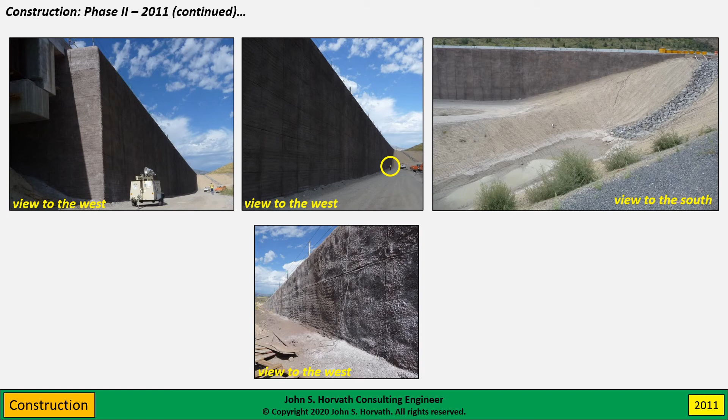I want to address quality assurance. I feel very strongly about this subject, because trust, hope, and luck are not rational strategies in engineered construction. I don't mean to be facetious, but I've seen too many times, especially on smaller projects, people say it's a small project so they'll take the contractor's word for it, or the owner doesn't want to spend money on inspection. In my experience, some of the smallest projects have had the biggest problems, simply due to lack of quality assurance. A robust program of manufacturing quality assurance, in this case of the EPS blocks, and construction quality assurance, how they're placed, etc., by an independent agent really working for the project owner, is always required, no matter the size of the project.

It's important to understand quality assurance is not the same as quality control. I know some people use these terms interchangeably, but in engineered construction they are distinctly different. Quality control is what a manufacturer or construction contractor does internally to check quality. For example, with the EPS blocks, the EPS block molder in Kent, Washington had their own manufacturing quality control process in their plant.

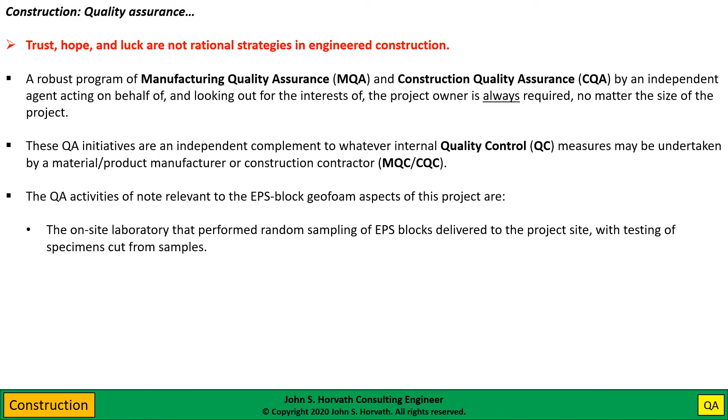The relevant QA activities for the geofoam: there was an on-site lab that did random sampling of EPS blocks. The contractor was told ahead of time, look, at our discretion we're going to take one block out of every so many blocks, out of every so many cubic yards or cubic meters of EPS you deliver to the project site, and we will take one of those blocks for testing. You don't tell them ahead of time which one - that was decided when a truck arrived at the project site. So there was random sampling of the blocks and testing of specimens cut from those samples.

Now, although the blocks may have been sampled at random, where you cut test specimens was not at random. There's well-established places where you should take samples within an EPS block, and that's because when you mold an EPS block, it never - and I say never - will have a uniform density or unit weight. When I talked earlier about the blocks on this project having an average unit weight of say 1.5 pounds per cubic foot, or an average density of 24 kilograms per cubic meter, that was an average for the entire block, which is 1 meter by 1 meter and perhaps 2-3 meters long. It's simply the nature of block molding EPS that you're going to get density variations within a block.

It's like when you bake a loaf of bread in an oven - when you take out that loaf of bread, the edges are going to have a brown crust, whereas the inside is not going to be baked to the same degree. So it's a similar thing. When you bake anything in an oven, you're never going to have uniformity of the product, and it's the same thing with molding EPS blocks.

So there's a rhyme and reason for taking samples at these locations, and the rationale is given in some of these publications I've referenced previously. You can find them on ResearchGate.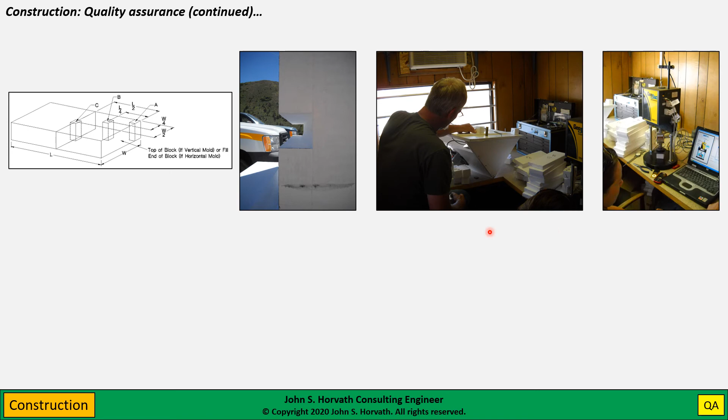This is how you do it correctly. This is not how you do it correctly. This was an interstate highway project in the United States, a very high-profile project in recent years. I'm not going to name it and embarrass those involved. This was actually, I believe, the state doing its own testing in this case.

Where the laboratory didn't take any of these things into account - they're using the same setup, platens, load cell, and testing apparatus that they use to break concrete cylinders. Now, you do not break concrete cylinders in the same apparatus that you test little 2-inch cubes of EPS. You can, but don't expect the results to be appropriately accurate. In this case, the weight of the platens alone probably overwhelmed the EPS blocks, not to mention the fact that you're probably down at the extreme low end of the range of this load cell, which was intended to be used to break concrete cylinders.

Bad habit, bad practice.

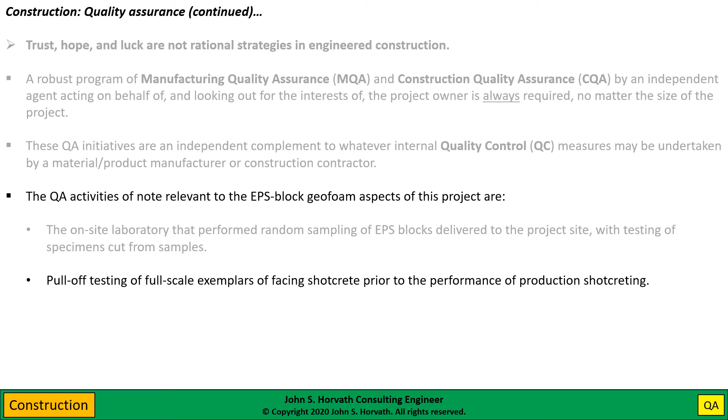There was also pull-off testing of full-scale exemplars of the facing shotcrete. Before the contractor got to go ahead with the production shotcrete work, he had to do some test shots. Chains were cast into the shotcrete so it could be pulled in tension or shear, testing the adherence of the shotcrete and wire mesh to the EPS blocks. These were saw cut so the cross-sectional area of the shotcrete was well defined.

In summary, with quality assurance, I won't embarrass myself trying to pronounce this phrase in French, but the same thing was said a century later in English: whatever is worth doing at all is worth doing well. I certainly feel that way. I've worked with geofoams in general and EPS-Block Geofoam in particular since 1987. I've done a lot of research, a lot of writing, and I've been involved in many projects as a consultant.

Really, you've got to pay attention to detail when doing an EPS-Block Geofoam fill. I've highlighted some of the positives of the Topaz project, and not just because I was involved as a consultant. To be honest, my involvement was during the design phase—I wrote a specification saying how it should be done, but then it was up to the state's inspector to make sure it was done. So the reason the contractor did nice work wasn't because of me. Yes, I wrote the specification, but my point is that the state was conscientious in their inspection, the contractor was conscientious in instructing their workers how to do things right, and everybody was on board with producing a quality product.

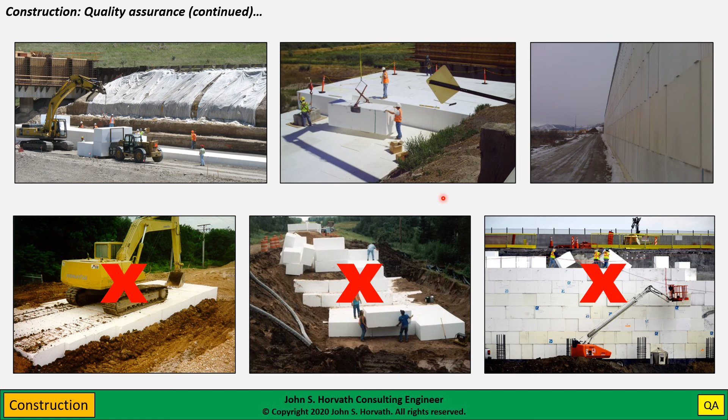There's always a way to do it right, and there's always a way to do it wrong. In my experience, it's a cultural thing, meaning you need a good specification about how things should be done, and you need to have a meeting at the beginning of a project. Before work started at Topaz, I went out to a meeting with the design engineers, the state, and the contractor at the project site, and we all talked about making this a quality job and working together to get it done. So if you set the attitude at the beginning, everybody pulls together and you can get a very nice job. If not, you wind up with slipshod work like this. I could go on and on showing other examples of how not to do things, but I think you get the point.

A postscript. Usually at this point, this is where most case history discussions end. Most case history presentations and papers end with the end of construction, implying they lived happily ever after. They show you what the design was, what the construction looked like, and that's the end of it. But as I said at the beginning, one of the interesting things about this presentation is that this project has now been in the ground about a decade, so we could do better than that and look at some things toward the present.

Of course, in engineering construction, the end of construction is never the end. It's the end of the beginning, but also the beginning of the end for that structure. These structures, especially highway structures nowadays, may have a design life on paper of the order of 100 years. The actual design life, who knows how long, could be even longer.

Just look around you. Think of how many things you deal with as a civil engineer that were built 100, 200, or more years ago. Those of you in Europe, here in the United States we talk about, gee, that's an old church, and it's 100 or 200 years old. In Europe, you say this is an old church or an old mosque, and you're dealing with things that are many hundreds of years old. So the point I'm getting at is that sometimes we don't know how long structures are going to last. It could be well beyond some theoretical limit.

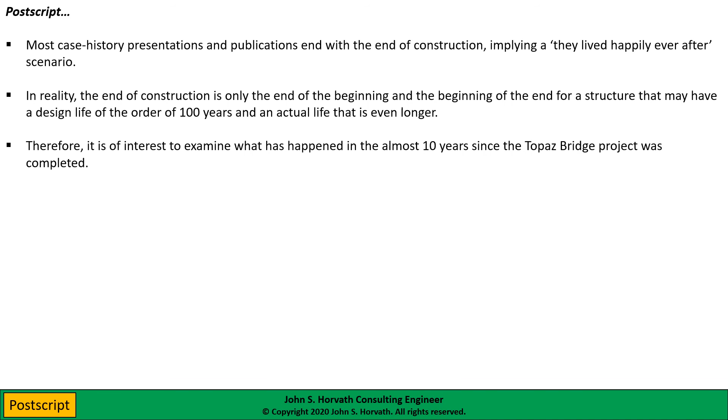First of all, early on in 2012, and this was a surprise to me, when the American Society of Civil Engineers Geo Institute had their annual geotechnical Geo Congress, they used the Topaz Bridge project both for the cover photo of the conference announcement and program, as well as for the cover of the published proceedings.

There was an industry award, the American Road and Transportation Builders Association, ARTBA, issued an award to the state for the project for its innovations. I was quite honored to be one of those that the ITD, the Idaho Transportation Department, honored personally for their participation in the project. These awards also occurred in 2012 — one an industry award, and one within ITD's own awards. So I was very honored to receive an award from the state for participating in the design and construction of this project.

More recently, in 2015, the Transporter, an in-house digital newsletter of the Idaho Transportation Department, featured a retrospective of the Topaz project. This is very interesting in my opinion, because this is now the owner, and the owner is generally the most critical participant in any project, since they're the ones who've got to live with it. They own it, they have to maintain it, so they tend to be the most critical, or certainly the most objective, in their critique.

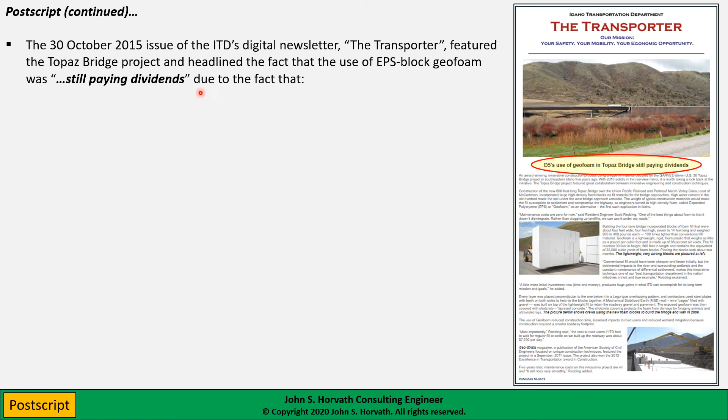In this digital newsletter, they noted that the Topaz project was still paying dividends, to quote them exactly. Some other quotes from the article: maintenance costs are zero for now, the roadway still rides very smoothly, and the foam — in this case the EPS block-molded EPS — is robust as a construction material.

I was very heartened when I saw this article, because it confirms what I've known for a long time, and others have too: when you do a project cost estimate, it should not just be the initial cost. Too many people focus on, I want to build something, how much is it going to cost to build it? That's very short-sighted, and you will very often not get the overall most efficient design.

Because certainly with transportation earthworks, you need to take into account what we call now accelerated construction. Here in the United States, the Federal Highway Administration has known for some years now that very often it is overall cheaper to perhaps select a design alternative that costs more, but that you can build faster, because there is a time cost to delay.

On the Topaz project, the delay was very modest. The state estimated that every day the project design was delayed would cost $7,700 US per day, and that was in 2010. But it's heartening to see people formally place a value on doing things quicker, even if it costs more money, because you save money in the end. There's a time cost to delays.

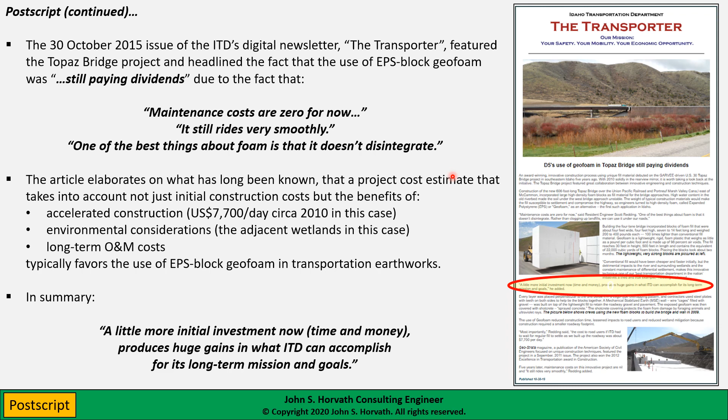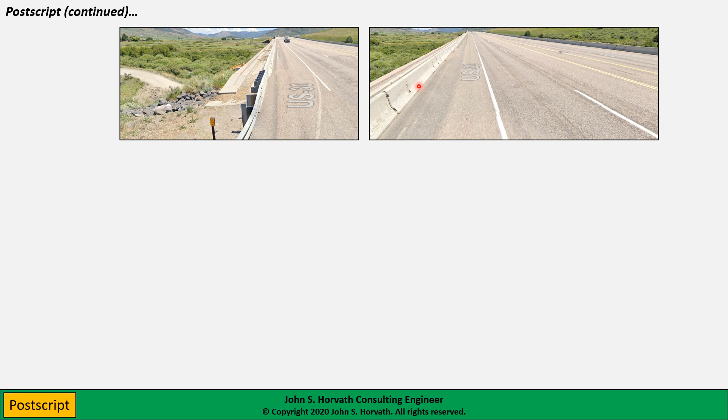Again, any rainwater or snow melt runs from the roadway underneath these cutouts in the Jersey barriers to the channel that's been cast into the top of the gabion wall here, down this channel and into the detention basin. Pretty simple, but clearly an efficient system, seems to be working well. I don't notice any issues in almost 10 years of usage. When you enlarge this photo, this appears to be some like straw or vegetation.

Perhaps this fell off a truck. This is a very rural area. There's a lot of livestock growing and farming in this area, so it would not be unexpected that you have commercial vehicles hauling hay and things like that, where some of that material blew off and collected on the side here.

So now we're proceeding down the road. We're going towards the new bridge, right? Obviously we don't have the truss bridge anymore. We could barely see the new bridge here, the concrete deck.

Again, kind of remarkable to see that we've made 6 lanes out of what used to be basically just a 2-lane bridge with minimal shoulders.

A little bit of pavement deterioration as we get here, the bridge transition here, expansion joint here. So the bridge begins here, and it's interesting - they basically made a single bridge out of 2 independent 3-lane plate girder bridges. But all in all, this is hard to see from this viewpoint, you don't see any gross settling or anything like that, or gross potholing or pavement deterioration.

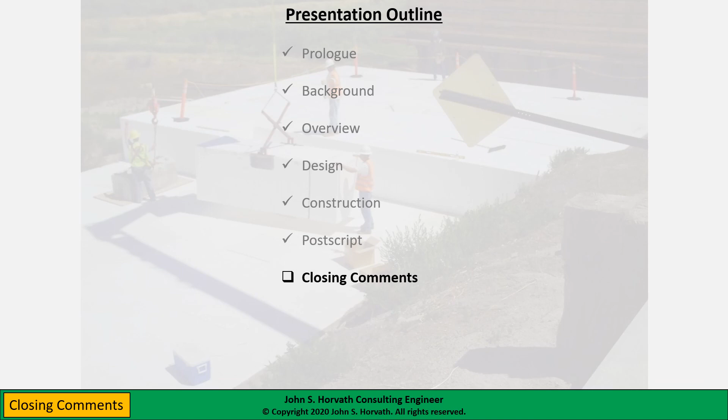Well, just to close out this presentation, certainly in my almost 50 years of professional practice, I've learned that successful construction projects are always the result of what I call a we, never just a me. And certainly the Topaz Bridge was no exception. There really were many organizations that collaborated over several years of design and construction to make this project happen.

A lot of credit goes to the local civil engineers who, when confronted by the challenges of the West Approach Embankment in particular, were willing to look at a technology that had not been used for roadways in the state of Idaho up to that point in time. And just as much credit goes to the owner, the Idaho Transportation Department, for being open-minded.

I've worked with geofoam since 1987, and I've had occasion to deal with many state transportation departments in the United States, and really no two are alike. There are some that are very progressive, always willing to consider new technologies. And there's some that are very closed-minded - you know, we've always done it this way, we're always going to do it this way, this works for us. So just like individual human beings, these DOTs can be very independent and individual as well. Certainly the ITD deserves credit for being willing to consider something new.

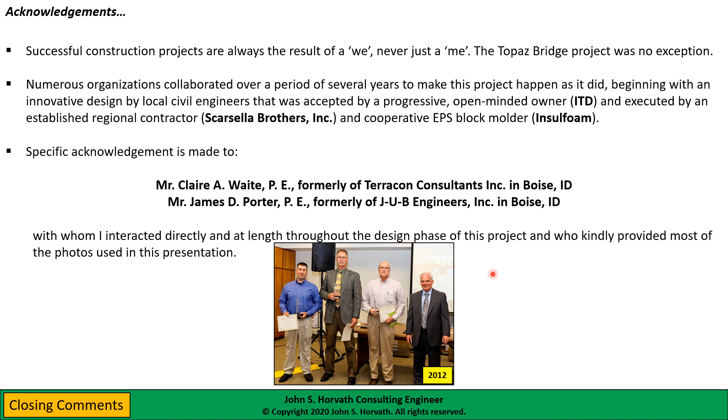A couple other acknowledgments. Larry Johnson, PE, was the former principal and owner of Heller & Johnson in Connecticut. Heller & Johnson was a small regional geotechnical firm, since bought out by GZA Geoenvironmental when Larry retired a few years ago, or semi-retired. Larry still works for GZA. But in any event, my professional services with Terracon were actually through Heller & Johnson. So my involvement with the Topaz Bridge project was as an employee of Heller & Johnson in this case, and that was for professional liability reasons.

But I worked with Larry for many years before he closed his firm and appreciated his cooperation with this.

And last but certainly not least is the National Cooperative Highway Research Program, funded by state departments of transportation and the FHWA, Federal Highway Administration in the United States. I acknowledge them with my personal gratitude because to date there have been two multi-year NCHRP research projects involving EPS-Block Geofoam. The first one, starting around 2000, involved the use of EPS-Block Geofoam for embankments on soft ground, and that was the report and standard I showed you previously that was used specifically for the Topaz project. A couple years after that, there was another NCHRP project involving the use of EPS-Block Geofoam for slope stabilization, not necessarily in soft ground conditions, just in general. I was very fortunate to be a co-principal investigator for both of these NCHRP projects.